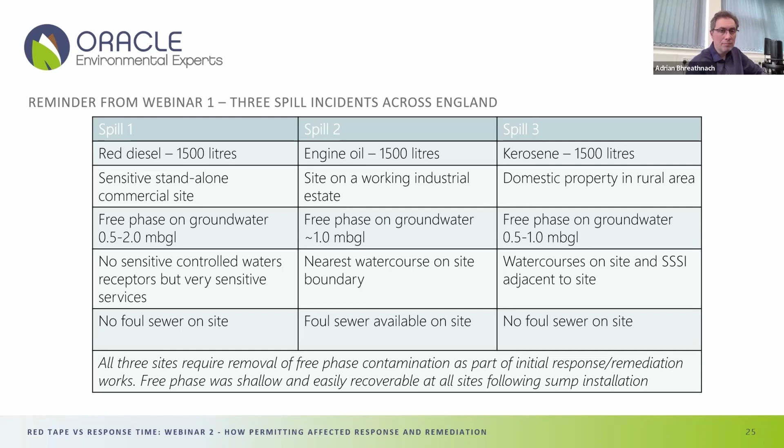So that's exactly what we've tried to achieve here. We've tried to get systems installed as quickly as we can to get control and prevent wider migration of the contaminant as well.

So in terms of the challenges faced, some of the other companies in the industry will no doubt have come across these issues, and I'm just trying to highlight some of those here.

We've essentially been told that the Environment Agency in England are no longer accepting local enforcement positions. Basically the stance the local EA office would take is that you can do this and we won't prosecute you - that is now removed, so they can't adopt these local enforcement positions.

And the reality we're seeing at the moment is that we're not sure that is being strictly applied across the country, and it still seems that some areas are accepting them and others aren't.

One of the other things they're looking at is they don't accept what's called de minimis, which essentially means the absolute minimum, a low risk kind of stance with regards to discharges from treatment systems. It used to be the case that if you could demonstrate your discharge was of such low concentration that it didn't pose a risk to the environment, then you could carry on with that discharge. That, in theory, is no longer accepted.

One of the other restrictions - if, for example, you've got a foul sewer available on site, working in a more urban commercial environment, then you're likely to go to foul sewer for your discharge. Every sewer has its own constraints in terms of how much flow can actually be discharged, and that has proven really challenging for us on some sites.

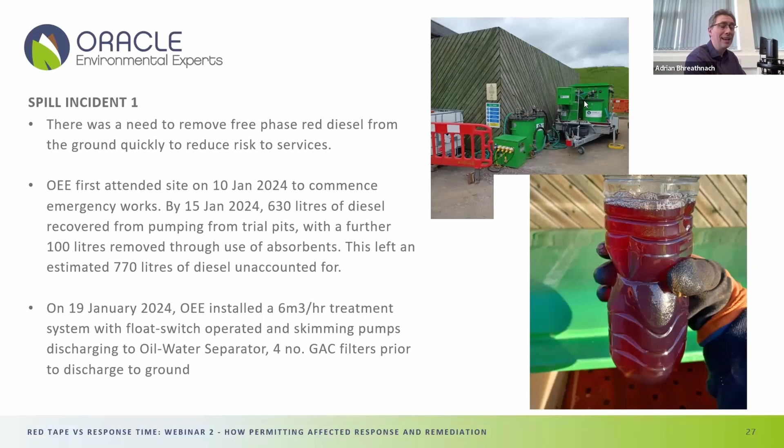Thanks for explaining that. So, in terms of how we went about getting that system installed, the EA were notified of the system installation, under what's called RPS 215 - Remediation Position Statement 215, which essentially allows the discharge of small volumes of contaminated groundwater to ground under specific conditions, which I'll talk about in a second.

So one of the key limits on RPS 215 is a volume related limit. If you treat more than 1,000 meters cubed, or if your system is going to be operating for more than 6 months, then you should deploy a standard rules permit for land remediation. That's a threshold that's been around for a long time - yes, absolutely. So that's the approach within England, that if you're going to go over that volume, you need to deploy a mobile plant permit, as it's called. So that's what we did when we knew that was going to happen.

This 1,000 meter cube, is that over the cycle of the whole project? Yeah, so it's not within a month, not within a week, it's the whole volume, and it should include the soils and the waters. So if you're treating both, then it needs to include that as well.

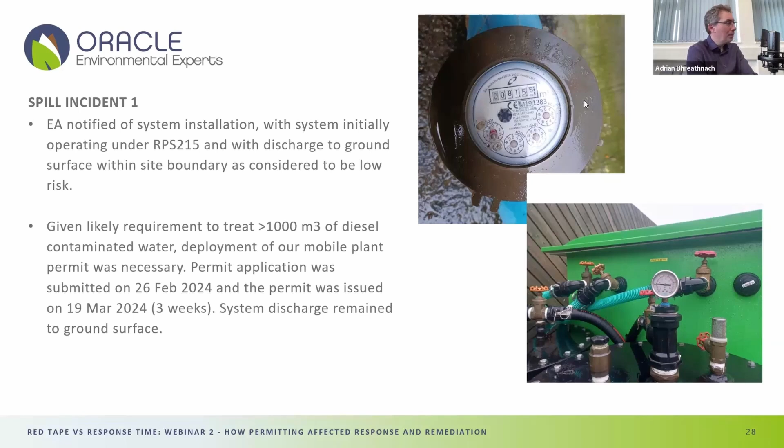We were able to continue the operation of our system under RPS 215 whilst that permit deployment was being reviewed. That's the key pragmatism you want to see - we want to carry on cleaning up the environment here whilst having that permit deployment reviewed. So it's all in all quite a good experience in that regard.

So what did we see in terms of the recovery? This is just a graph of cumulative flow through the system, and from Jan 24 to Jan 25, we treated 2,658 meters cubed of diesel and diesel contaminated water, to the point that we managed to achieve no free phase diesel anywhere, and very low concentrations of dissolved phase hydrocarbons as well. We're currently assessing the need for further treatment, with ongoing monitoring to ensure we've achieved the goal on this one.

This is on taking samples, getting them analysed, and completing your data sets - the data we would collect for verification purposes. We're collecting samples from the recovery sumps we've installed, and some of the manhole chambers as well, just to confirm that we've achieved a sufficient level of cleanup.

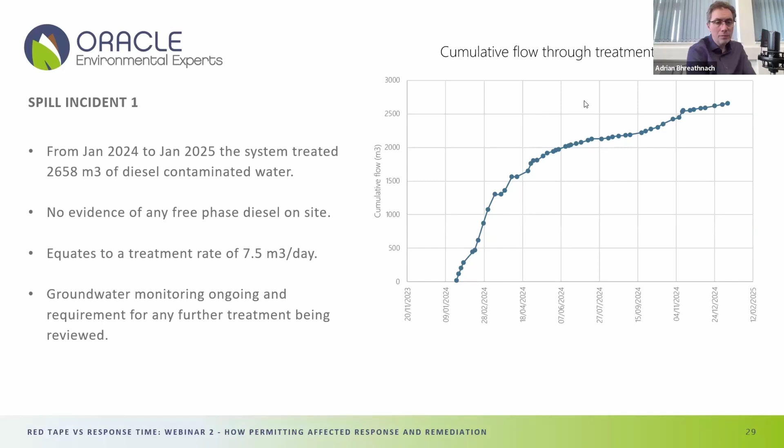That's the graph. As you can see, the early stages of that graph are key, because there are some very high flows through that system. But overall, we had an abstraction rate or treatment rate of 7.5 cube a day going through the system. And that's what we saw.

Excellent. So we've gone from January 24 with free phase diesel in the ground, and lots of it, all the way through to January 25 with crystal clear water. That's a good picture. The other thing I wanted to stress is that the alternative to deal with that volume would have been 100 articulated vacuum tanker movements, for example. It's a fairly simple comparison, but as we mentioned maybe in the first webinar, it's not just the volume you want to remove, it's actually having control on that site.

With the system we had installed, it was 24/7 control of the groundwater and removal of the groundwater and the diesel as well. We've removed all of the diesel from the groundwater, and by discharging it back to ground, there's no net loss of water.

So from a sustainability point of view, in terms of your water cycle, you're net zero because you're returning that water to ground. And are these remediation systems remotely monitored?

They can be. One of the things Adrian has been stressing is that some of the work is remote. It can be quite far, and the telemetry, like the technology, should be relatively easy to assess and move forward with because it's fairly readily available now. We don't typically have the extent of telemetry on these kinds of systems that we would for contaminated land or a big remediation job, principally because of the cost involved.

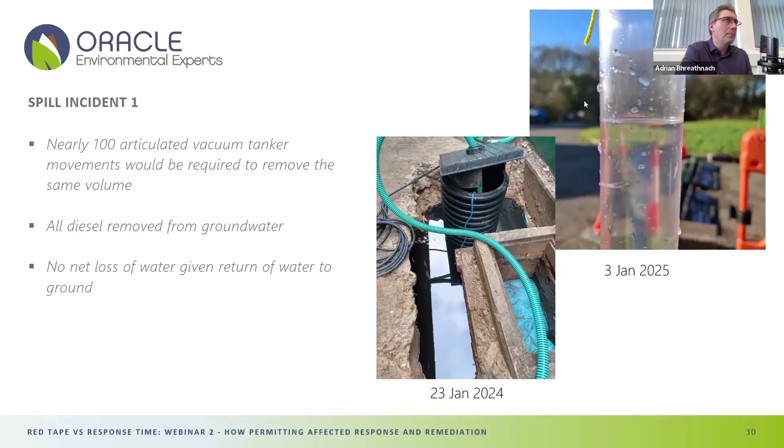So in terms of the permitting approach, just to recap for incident one: RPS 215 was used, but there was some to and fro with the agency. Initially they suggested, can we not go to the foul sewer? But that was on the opposite side of the A road, and there was literally no way we could get to that sewer safely. So the best option was to convince them it was appropriate to treat and go to ground on this one - RPS 215 was applied.

That needs 5 days notice in terms of providing a letter detailing what you're planning to do on the site. You send that to your local groundwater and contaminated land team, and they review what's being done. So that's the minimum timescale you'd expect to get a system onto site - 5 days, really.

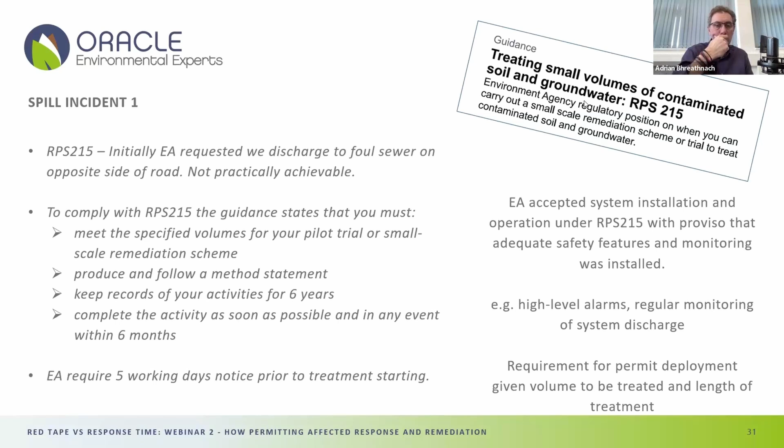So the EA accepted the installation of the system under RPS 215, with the proviso that there were adequate safety features and the appropriate monitoring we talked about earlier, in terms of collection of samples to prove it's doing what it's meant to do - high level alarms, regular monitoring of the discharge. But there was a requirement to deploy our mobile plant permit due to the length of time of treatment, but also the volume that was going to be treated as well.

So this is the brief summary for incident one, and the timescale from first attendance to installation was 9 days. Not too bad.

There was some temporary pumping and removal within that initial period, going into IBCs and other storage containers on site. But it doesn't give you that 24/7 control that we talked about.

And then the timescale for permitting approval for the mobile plant permit was 3 weeks, which is great. I think in theory up to 8 weeks is typically allowed, but sometimes it can be longer. So 3 weeks is great.

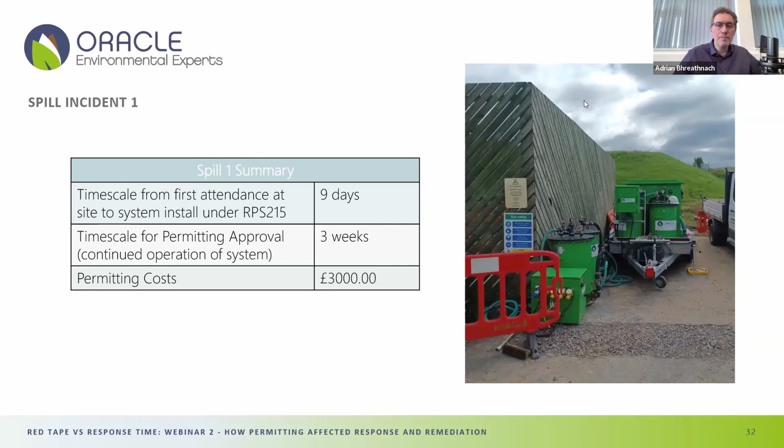And the permitting cost, the cost to deploy the permit, is £3,000. And as I said earlier, that's the same for a big gasworks site compared to a small spill site. Quite a high cost. It is, I think the issue is that it should be proportionate to the incident.

When you've got one contaminant such as diesel, kerosene, or engine oil, and an established treatment process like an oil water separator and carbon filters, it should be relatively straightforward to look at the risks. You do a surface water features survey and a groundwater risk assessment, just qualitatively, to assess the potential risks involved within a discharge. Those are fairly simple things to carry out, so it shouldn't take that long to review that process.

The key one is carbon, which is the industry standard for this type of contamination. It's so well established, it's been used for probably over 100 years. Even most water company sites will have carbon filters to strip out any potential contaminants that come through.

So it's so well established that the risk is really minimal, if you've got enough carbon and you've got that lead-lag in play. It comes back to what we were talking about earlier, which was the EA's approval of a system to achieve the desired goal, which is to strip out everything from the water and then discharge clean water to ground.

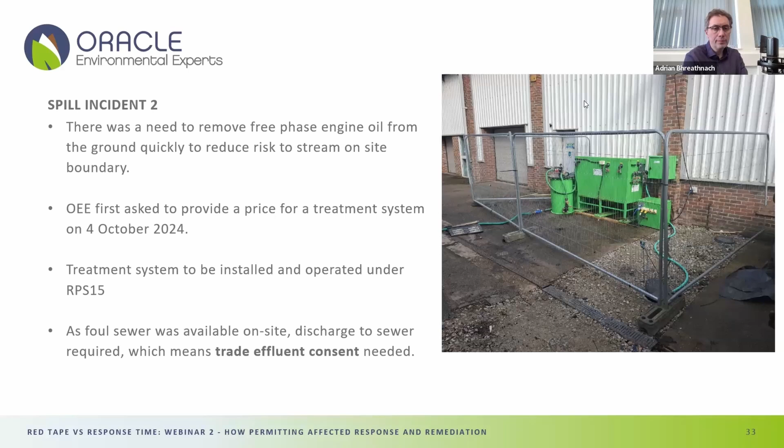How do you find those at the minute? Because we find them really variable. Yeah, absolutely, it's a very odd system at the moment, isn't it? Because you basically have to apply to the water retailer, not even the water company itself. It's a very odd system.

There's a set number of water retailers that basically manage all of these consents. It used to be the case you went straight to the water company in the area you were working, and you could talk to them directly about what you wanted to do, the urgency, and everything else. But now you fill in a form that goes to the retailer, who then contacts you.

Explain who the retailer might be. I'm trying to remember some of the names now, but it's not the water company. I find that surprising. No, it's something like Water for Business, for example.

There's a good number of other ones as well, but they manage that process for the water companies, it seems. So as a business, you have an account with this retailer. Irrespective of wherever in the country you might be in England, if you're looking to discharge to sewer, you would go the same route every time.

It does present a real challenge. Do they understand what you're doing? Probably not most of the time, because it's quite unique. They're just processing paper, essentially, though there is a technical element too, because they liaise with the water company to agree the limits placed on the discharge. So there is a technical component to it as well.

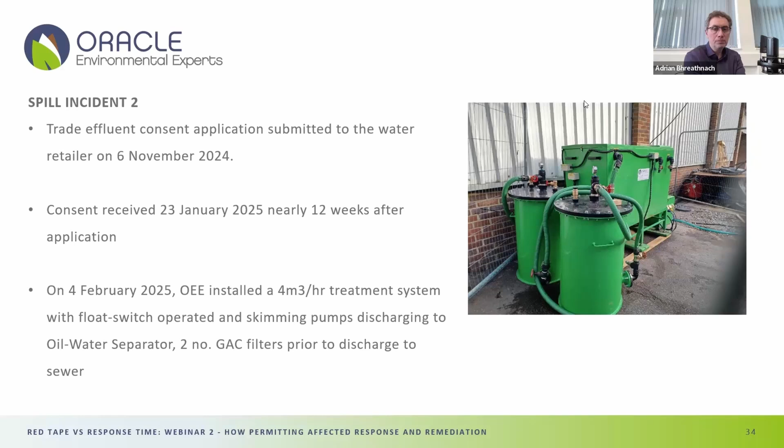After the 12 weeks had gone, we installed a 4 cubic metre per hour treatment system, as you can see here. Again, we've got float switch operated pumps within the recovery sumps, discharging to an oil water separator, then through the lead and lag carbon filters, and discharging ultimately to foul sewer. That system initially operated under RPS 215 and still is currently, and we haven't got the high flows that we had on that first example I mentioned.

So we have got limits set, as I mentioned, in the consent to discharge to sewer - limits in terms of flows, quantities you can discharge, and certain components within that discharge as well, so you've got to prove it's below these concentrations. And lo and behold, that's what we're pulling out is black oil. Wow, and it does seem to keep coming, so whether that estimate of 1,500 litres was right or not, time will tell.

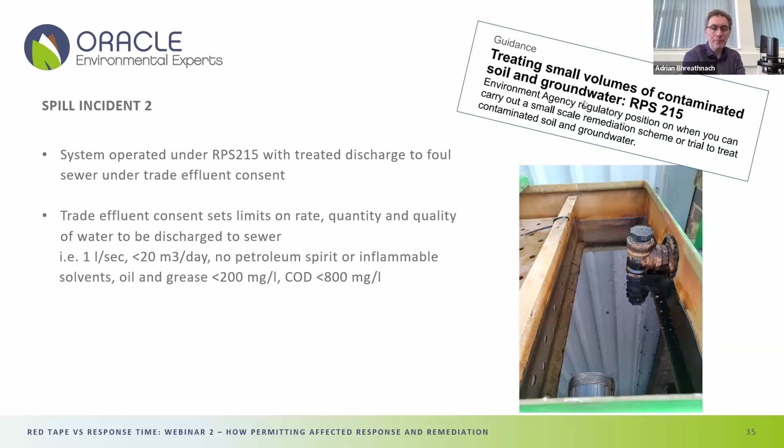That looks highly contaminated - there's quite a lot of engine oil. We're getting pure engine oil out of the ground, as you can see here. In terms of timescales from first contact to system install, over 4 months on that one. As we discussed in the first webinar, the properties of the engine oil meant it was unlikely to migrate too quickly, and that's exactly that as well.

Had that been kerosene, then it could have gone much further. Potentially, but again, it's the fact that it's covered in hard standing - you haven't got rainfall pushing it around.

So the risks were lower, so the pressure wasn't quite as great in terms of timescales there, but it's still too long in my opinion. It's really frustrating as well.

On the plus side though is the cost. It's £300 to apply for the trade effluent consent, and then there's a fee levied based on how much you discharge. We've estimated that's probably going to end up being around £450-500, so it's a much lower cost than deploying the permit currently. So swings and roundabouts.

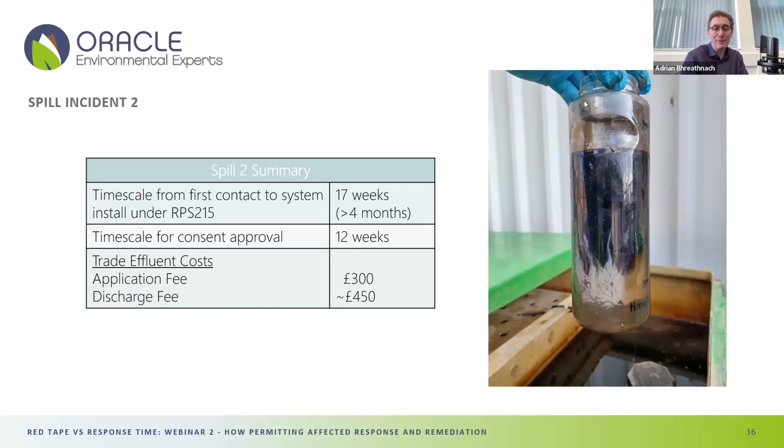Absolutely, yeah. So the last case study was a 1,500 litre kerosene spill on a domestic property, with lots of kerosene in shallow groundwater migrating around services. It had impacted the sewage treatment plant on site as well, got into ponds, got into streams, and there was an SSSI site next door.

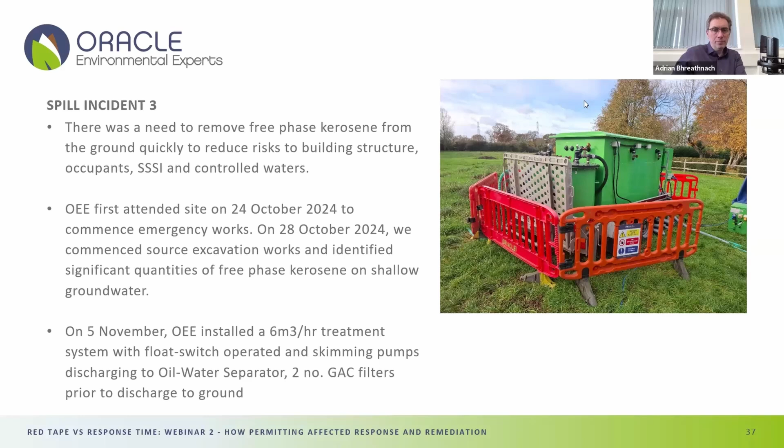So we first attended on the 24th of October last year, and started the emergency excavation works and sump installation just a couple of days later. Then on the 5th of November, we were able to install a treatment system, again with oil water separators and granular activated carbon filters, with discharge to ground because there was no foul sewer available. That was done through RPS 215 again initially.

But similar to the first example, we quite quickly saw that we were going to be getting up to the 1,000 meter cube limit, so we deployed our permit as well. Not such a good experience in terms of approval of that permit - it was submitted on the 11th of November, and the permit was issued on the 8th of January. So we're looking at around 12 weeks for the approval on that one.

But on the flip side, we were allowed to carry on treating - that's the key thing, we were allowed to carry on operating our treatment system. So we had control, we had containment in place. If they'd said you can't do anything until you've got your permit issued, it would be a different issue, and I have had that scenario where you literally get told you need to not do anything until you've got the permit.

Or else we might prosecute you. And you basically have to ask, is it going to be in the public interest for the Environment Agency to take a prosecution in that regard? But equally, as a business, you have to take that decision - are you going to do something that's in the best environmental benefit, which will ultimately have a positive impact, but give the risk of reputational damage from being prosecuted, and the business risk of having to stand up in front of a judge and say I did it for all the right reasons and it had a positive impact, and eventually I did get my permit, so I would have been able to do it. It's a really tricky scenario.

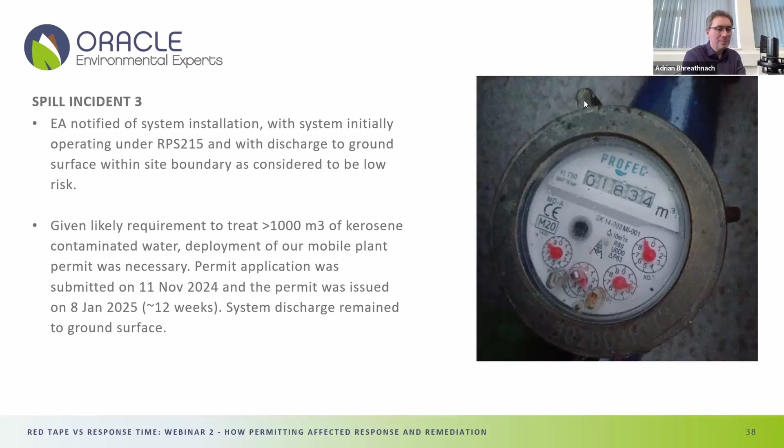So the upshot on this one was that it was just under 2 weeks from instruction to first attendance at the site to installation of the system, and this was the kind of flow we were seeing through it. It's still currently operational on site.

So 13 days from first attendance to installation under RPS 215. 12 weeks though for that approval for the permit. But thankfully we were able to carry on under RPS 215 anyway, and £3,000 again for the deployment of the permit on this one.

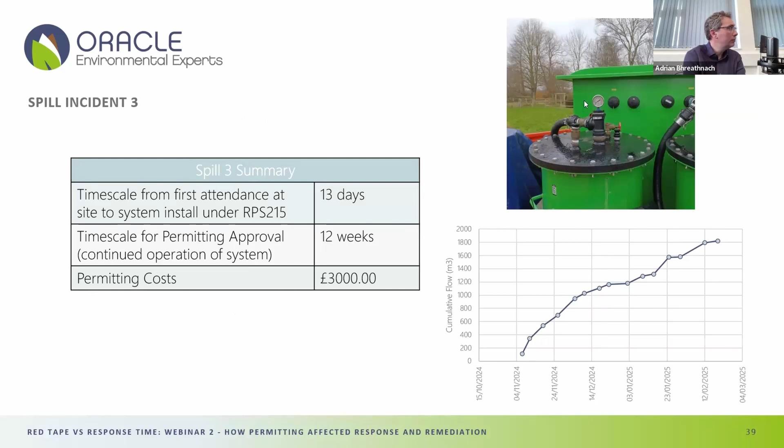So the key stinker there is really the one where we had to go to foul sewer, and that was principally down to the length of time it took to get that trade effluent consent. So I'm not sure we're going to be able to change that greatly, in all honesty.

It's an interesting one, isn't it? Because it would be interesting to try and talk to the water companies, maybe the trade body, and just say, is there a way that we can look at that?

Well, we could do that through the Water Industry Association, trade association to trade association. And that's something we should do. Quite often there might be no net benefit or impact on the water authority, but there could be a scenario where we're trying to do it quickly to protect things. As we touched on before, I can't see why it needs to take so long.

Maybe AI is going to sort all this out.

You're looking at some key factors. You've got a known treatment system capacity in terms of the water company, so they know what their treatment system can accept. They know the size of the sewer you're discharging into, so they can quickly tell you what volume they can take, and then you add your proposed concentrations, which is non-detect. So it really should just be plug some numbers in, and out comes your consent. I cannot understand how it can take so long.

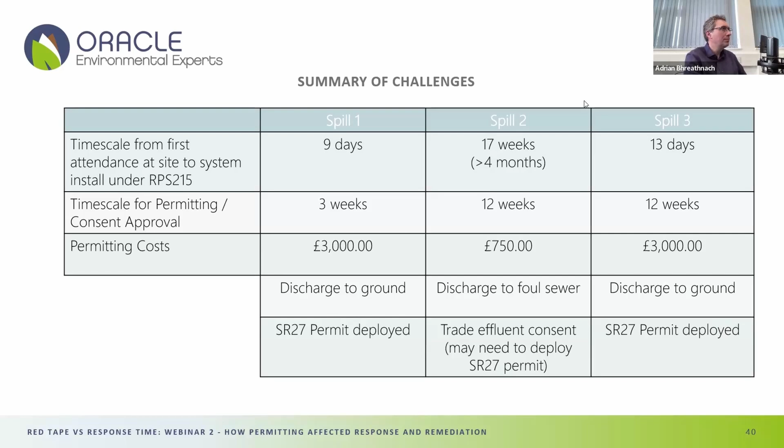So just to round off, I guess the kind of changes that are needed - I'll add the conversation with the Water Industry Association to this as well. Essentially, we need to get to a point where we're able to remove contamination swiftly, providing there's appropriate safeguards and monitoring in place. I think we all have to accept that.

And permitting costs - I accept there may be a need for permitting in terms of deployment of permits, but the costs associated with deployment of those permits should be proportionate, and based on the time required to review any given deployment of a permit. Hot off the press on this topic, I got an email from the EA yesterday in relation to our permit, which is a Standard Rules 27 permit, and they've now basically said that all permit applications will be online, and the review process will all be done online as well, with a view to speeding up that process.

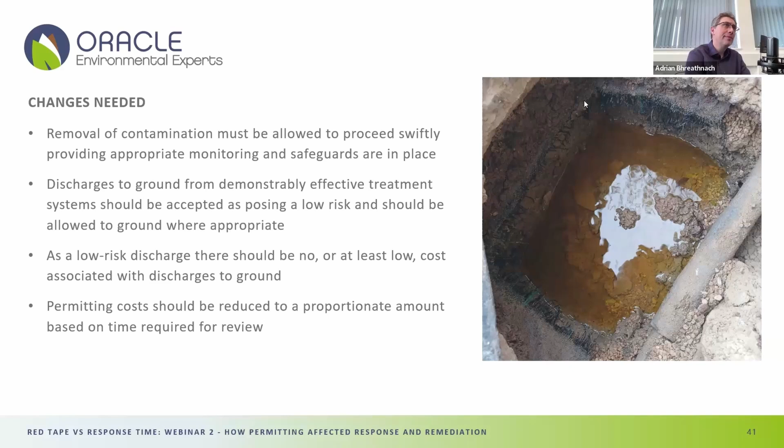So I think that's one thing they're looking at - can they rewrite the permitting regime with respect to these scenarios to make sure we can achieve swift remediation and make it work better. But all we're trying to do is clean up and manage spill incidents, which are unpredictable. Until we get on site and start pulling the stuff out of the ground, all that's going to happen is the environment is going to get worse.

Absolutely. And our whole goal is to not make it any worse. Yeah, there you go - golden rule. Don't make it any worse.